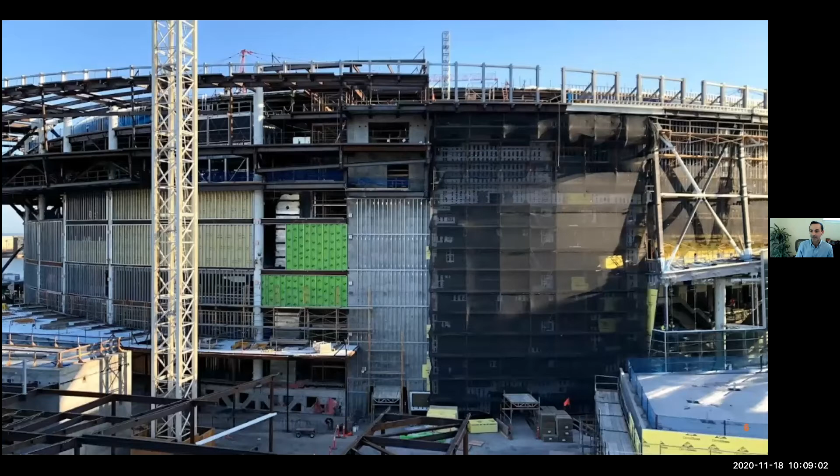A little later in the discussion, I'm going to jump into some of our guiding principles for building and delivering products to our customers, and it really all stems from our DNA in construction. But experience as a contractor is not enough. We believe that battle testing our software in the field is the right way to do things—put it under the most extreme conditions and make sure that when it gets into the hands of your super or your foreman, it actually just works.

Can anybody guess what structure we're looking at here? Go ahead and type it into the chat if you'd like to venture a guess at what this very large structure is. Or you could just say no idea—that's totally acceptable as well. I got Alan saying Chase Center. Anybody else want to venture a guess? All right, well Alan, you're the winner.

Our only guess is actually, in fact, yes. So this is the Chase Center in the Bay Area, new home to the Golden State Warriors—18,000 seats, 580,000 square feet of office space, and another 100,000 square feet of retail space. Myself and several other co-founders on the team were on this job site every single Friday for almost half a year, manually capturing this job site with static 360 photos.

Once the framing started to go up, it was taking us half a day or more just to take pictures of this job site. So not only was the capture work exhausting, it was way too time consuming, and we really just knew there had to be a better way.

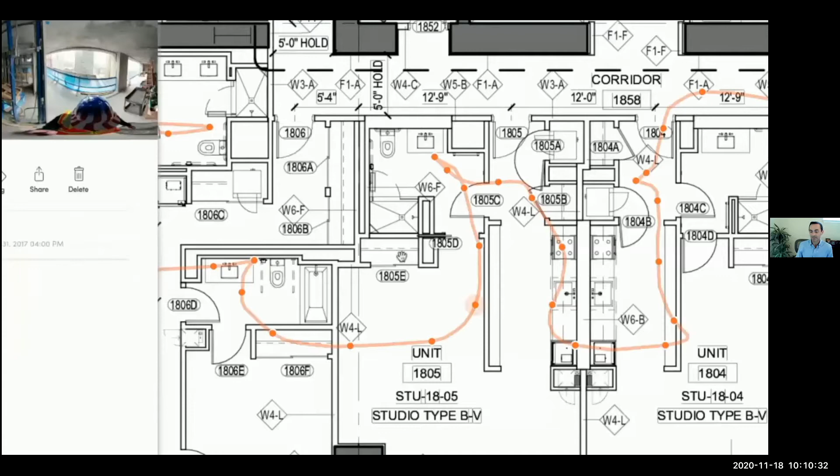That's why we created Video Walk, which, for those of you not familiar, is a workflow born from our own experiences in the field. You don't have to stop and take pictures—you just hit record and walk the job site. Our software automatically reconstructs the path you walked and places those pictures on the plans for you. This was a huge time savings for our customers as far as capturing the job site goes. But the main thing it did was unlock our ability to do what comes next, which was trying to answer this age-old, very challenging, very hairy question: what actually got installed today on the job site?

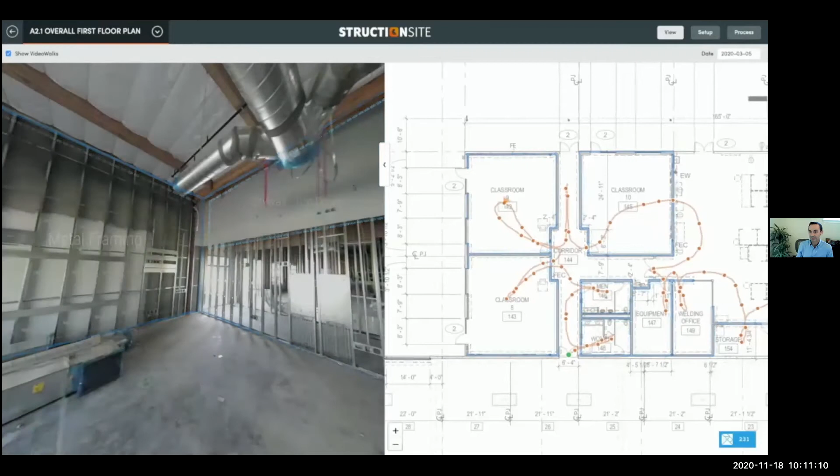So this summer, we launched a product called SmartTrack that can start to answer this really important question: what did we actually install today? And we make that an automated process for our customers. Using the 360 image data already collected in a video walk, combined with your existing quantity takeoff data, we can provide a visual map of what's installed, a production dashboard, and a CSV export that you can also import into your ERP or cost accounting system.

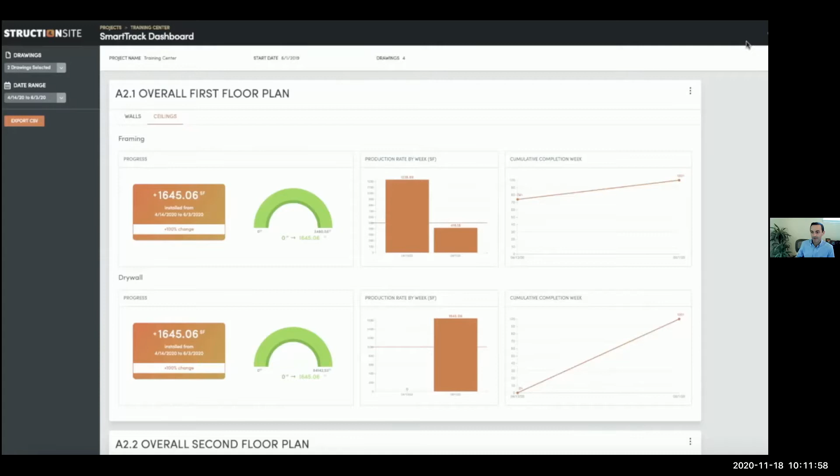So you walk to the job site on a Thursday afternoon, and you wake up Friday morning with a production report. This isn't something you're going to see at some point in the future—this is something we are actually delivering to customers today. If you didn't catch our summit last week, there's a great presentation with one of our early customers, Southmost Drywall, where their superintendent Ron Rankin and CFO Brendan Murray talk about how the software impacts their profits and the happiness of people in the field.

So that was a little bit about our past and what we do today. Before we jump into the future, I want to pause and reflect on some of what our team has learned so far that will guide us going forward. In the next four slides, I'll share some of our guiding product principles and core company philosophies—some we've had since the beginning, some that emerged in the early days as we built this company. I want to share them because I think they're a good window into how our team thinks about making products and supporting our customers.

Our first principle is truly grounded in our experience in the field and the construction DNA on our team: do what's needed, not what's flashy. There's a lot of technology being brought onto the job site today, and it's not all useful. As a software vendor, it takes discipline to stay focused on solving problems for our customers in the most practical and cost-effective way possible. A lot of the time that means doing something unsexy that just works, as opposed to something flashy. Our team continues to innovate and play with the latest technologies to see what's ready for use today, but if your super or foreman still can't figure it out in 30 seconds, we're probably going to put it on the shelf until it's ready.

This is such an important but really simple philosophy: you own your data. That means not only can you download all your raw files for project closeout, but we're committed to being an open system so your data can flow from StructionSite into other applications, even if those applications might be considered a competitor. This isn't just lip service—my co-founder Philip and our first product manager Bree are active leaders in the U.S. Institute of Building Documentation and Construction Progress Coalition, two organizations committed to creating open standards for sharing data across software systems in a non-proprietary format. You own your data is a really big one for us, and hopefully for you guys too.

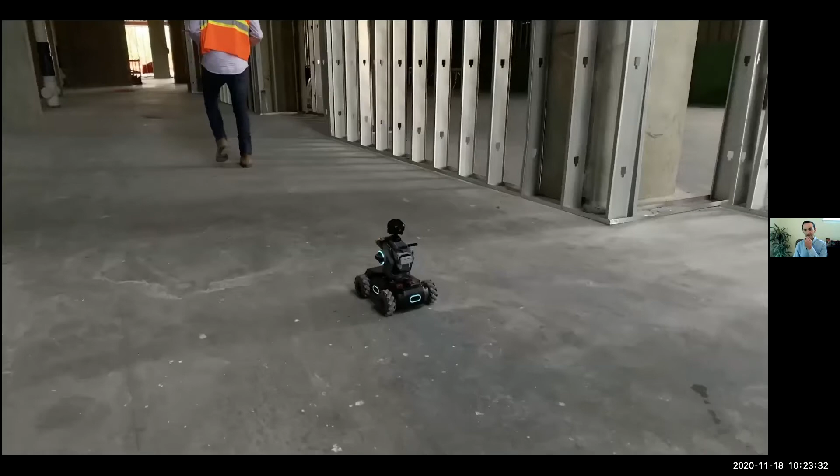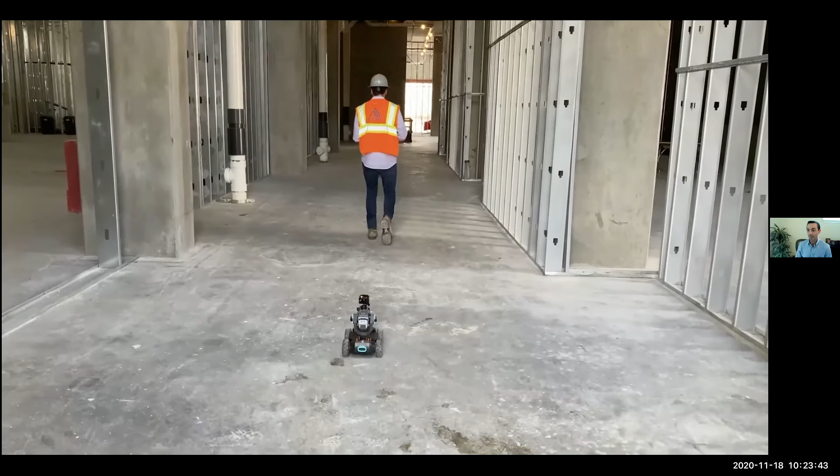A lot of our customers are not willing to wait for that future, and they're pushing us to deliver on this vision today. This is Andres Construction in Dallas, Texas - they've been testing the DJI RoboMaster to do automated capture. Other customers have started testing Spot, the Boston Dynamics dog, using it to capture video walks for them. We're seeing several different customers upload drone footage so that their exterior data can live in the same place as their interior data.

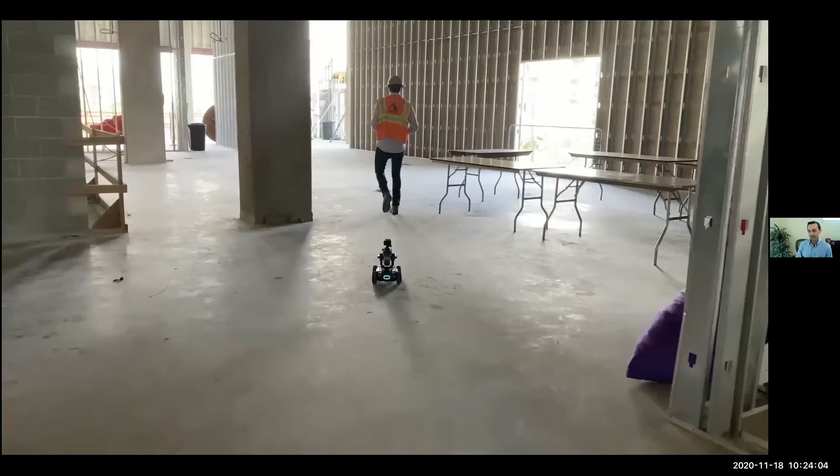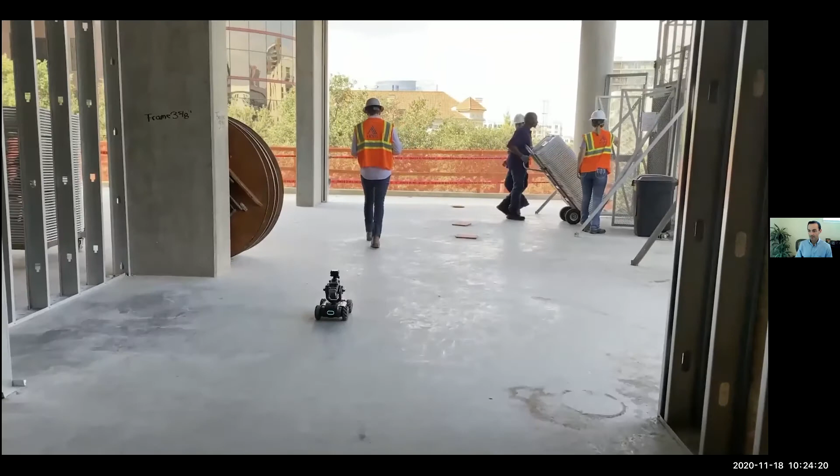Autonomous capture is a significant part of our strategy going forward, and this is a place I'd say keep your eye on in the next 12 to 24 months. We're not feeling entirely bullish on a lot of the current autonomous capture solutions we've seen, but we are starting to get excited about some of the ones coming to market in the next 12 to 24 months. We believe it'll take some time for that technology to become practical, but it's a space we're excited about and doing a lot of work in the background to make sure we're at the forefront of whatever technology can successfully navigate a job site without human intervention and be that capture workflow for your teams.

So once we've got all this photographic information, we can actually do some pretty amazing things with it. This is a detailed 3D point cloud generated from a 5-minute video walk of a construction site.

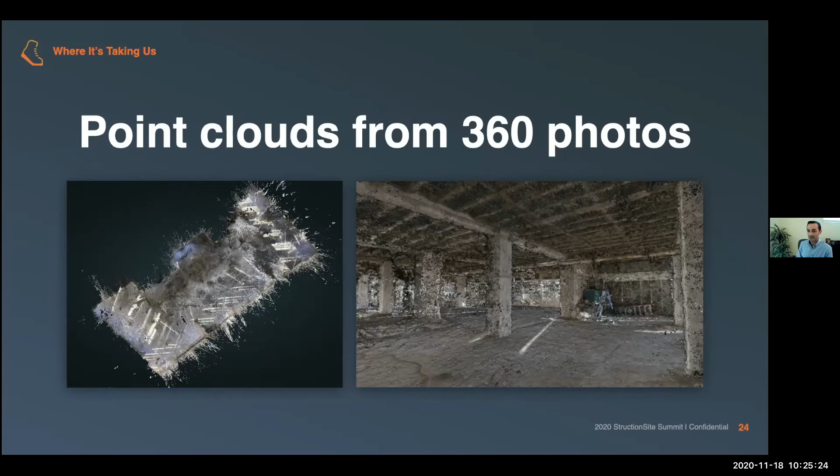Those of you familiar with photogrammetry know that it allows you to pull measurements and create models of existing conditions, but it's not horribly accurate. It's accurate to the point that you can see what you see here, but it's not a laser scanner, so we're not just interested in point clouds generated by photos. We know that for certain critical work, you need accuracy down to an eighth of an inch, and that really does mean laser scanning.

Fortunately, this is something that's really in the DNA of our company. This is Rithm, a company that my co-founder Philip and I started back in 2013. This product provides one of the fastest and simplest workflows to date for using 3D laser scan data to measure slab flatness and levelness, monitor the structure pre and post concrete pour, and track material quantities for flooring work. So it was very focused on floors and monitoring and these structural documentation and analysis tools. But this is something we're continuing to look at, how we integrate this type of technology into what we're doing today here at StructionSite, where it's not just 360 photos, it's looking at what we can do with laser scan data as well.

For those of you using laser scan data, we're definitely imagining workflows that seamlessly merge 360 photos with laser scans and make all that information accessible to your super or your foreman in the field. Laser scan data has historically been in the domain of VDC teams and pre-construction work, because the data is generally not optimized for viewing on a mobile device. But that's what your field people are using. They're not sitting in front of a computer all day, they have their phone and maybe an iPad. Pulling this data into StructionSite could change that and put this information in the hands of your people in the field where they need it the most.

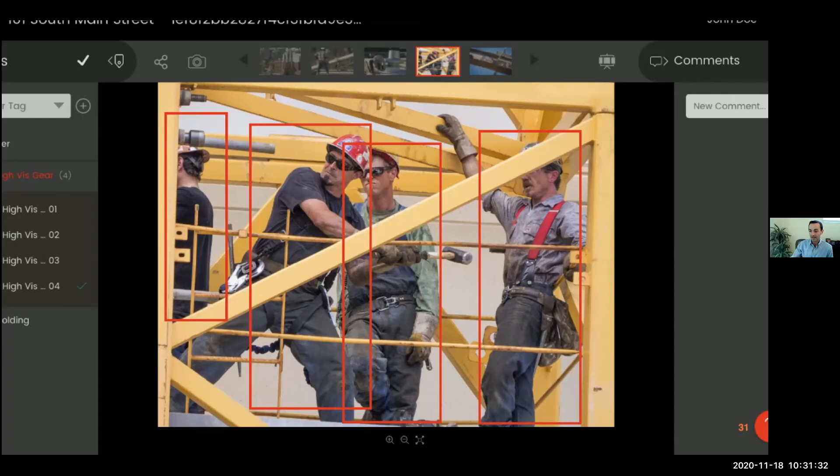So last week at our summit, our team actually announced an enterprise analytics product that's going to be available in a couple of weeks as well. For those of you on the call that are customers on an enterprise plan, you're going to get immediate access to this. Basically, it allows you to access real-time data and pretty detailed information about how StructionSite is being used across your company, across your projects, all the way down to individual users.

It's going to give you really unparalleled insight into knowing how your teams are adopting the tool and following the processes you've defined for regularly capturing the job site. So we're committed to not only showing you this information within our own product, but also allowing you to connect it to tools like Power BI, Microsoft, and other enterprise analytics tools you probably already have developed and deployed.

I'm going to stop and pause here for a moment to see if there are other questions you guys want to ask. I have a feeling everybody's going to be quiet today, so feel free to type it in the chat box, as some of you have done as we're going along here. Questions are very much welcome.

We're going to move on to the next big question we're trying to answer for our customers, which is: what got done and are you on track? As I mentioned earlier, this is a pretty hairy question to answer, and one that's historically eluded an automated way for our industry.

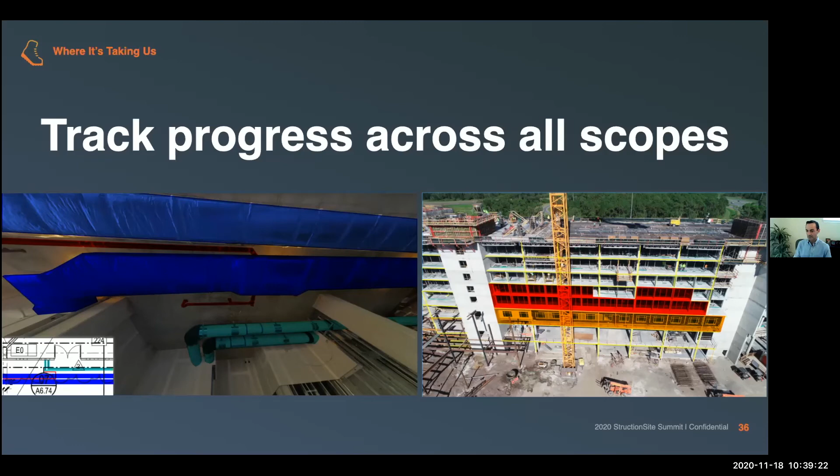This is going to allow us to truly understand how much of your schedule and your estimates reflect reality. And this is not sci-fi stuff. I know there's a tendency to sort of sell the big vision for the future and be very challenged to deliver that.

So I'll share that this is actually a workflow we've been experimenting with alongside Webcor on their SFO project in San Francisco. We've been able to help them identify when critical work first appears in the photos and when it's completed, which is really giving them the most accurate view of progress that they've ever had access to.

It's a very different view of production than what we've been delivering for SmartTrack as far as trade partners. But what we're hearing so far is that from the perspective of a GC, this is the highest value data that they could ask for as far as understanding if the job is on track.

So there's really these two worlds of how we view progress on the job site, and the lens we look through with the trade partner is different than the lens we look through as a general contractor. And we're exploring this workflow in particular to be more focused on the lens that we look through as a general contractor, and what we want to know to help us make better decisions about what's going on our job site and how to go have healthier discussions with our trade partners. And do that early and not late, before it's too late.

All right, so we're going to move on to our final question here. And this one's really about quality. Is it done correctly? And I think I mentioned at the beginning of this discussion, we think this is the hardest question to answer. It is the most nuanced question to answer.

Production is really about, is it in or is it not? And if I'm using computer vision and machine learning, if I see something there, there's a certain amount of confidence I have that that's installed. Quality is more nuanced, is a little more subjective, but it's also higher stakes, right?

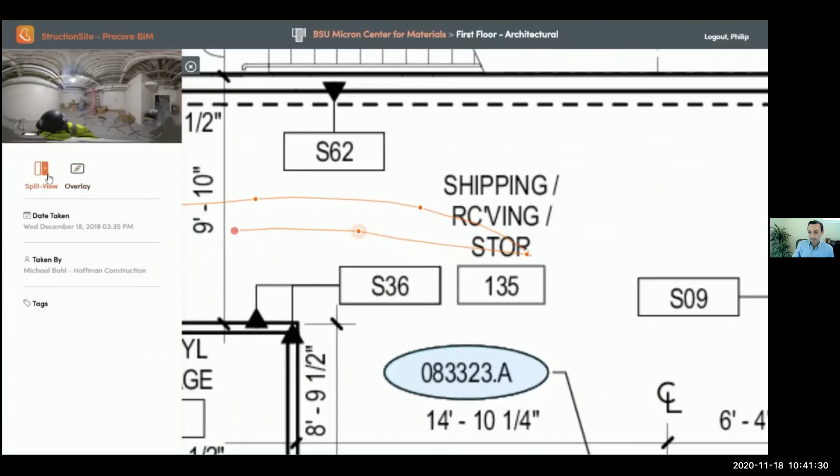And so let's talk about what that actually means to us. First, this means being able to compare design from BIM against reality on the ground. We've already got an integration with Navisworks that a few of you might actually be using, but Navisworks is not a tool that everybody has access to on the job site.

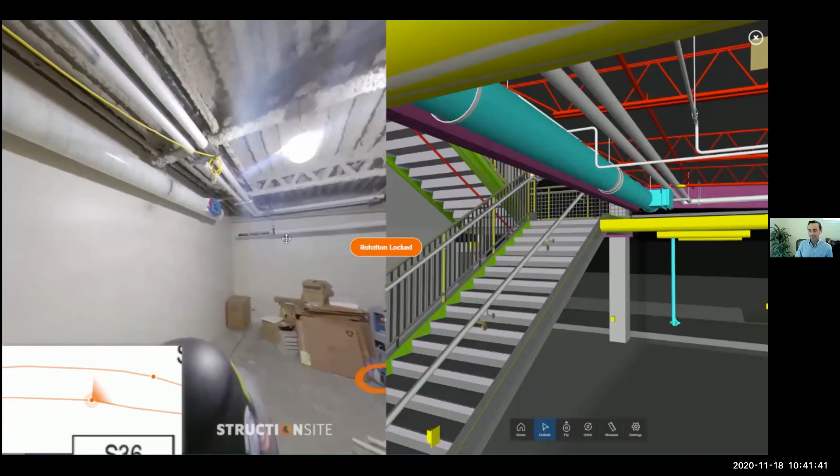And we also know that it's not the future, right? It's going away. It's not the future. It's not where we are headed. Some of you may have seen at Procore's Groundbreak conference that their keynote...

Basically, we're working with an integration with Procore BIM, which is what you're seeing here. That allows you to take the models on their platform and do sort of that quick heads-up comparison that you're seeing here, to be able to compare what the images are saying to what the model is actually saying.

We're also going to be partnering with Autodesk to allow this same exact functionality with the models that are being stored in Autodesk's construction cloud.

And on the Procore BIM side, what this also is doing is actually allowing our customers to have the same sort of tool set in our app that they have in Procore BIM. So if you want to take a measurement, you can still do that in StructionSite using the integration that you see here. Again, that's a measurement from the model.

We know that it's not just important to sort of have this comparison tool. When you see something, you've got to be able to take action on it. And that's why we're committed to make sure that basically you can do all of your QA, QC, and punch list workflows remotely, which is something that a lot of teams are being challenged with today.

We're working on a deep integration with BIM 360 issues, which I don't know if any of you attended AU yesterday, but they launched Build, which might be a totally different set of APIs.

I'm told the APIs will be overlapping and that they'll work together, but the environment is rapidly changing over there at Autodesk, so we're trying to keep track of that. Regardless, we're committed to building an integration with Issues and whatever comes next for Autodesk, whether that's Build. Basically, that allows you to link and create a new issue, or link an existing issue, to the StructionSite 360 photos, so there's bidirectional communication between those two platforms.

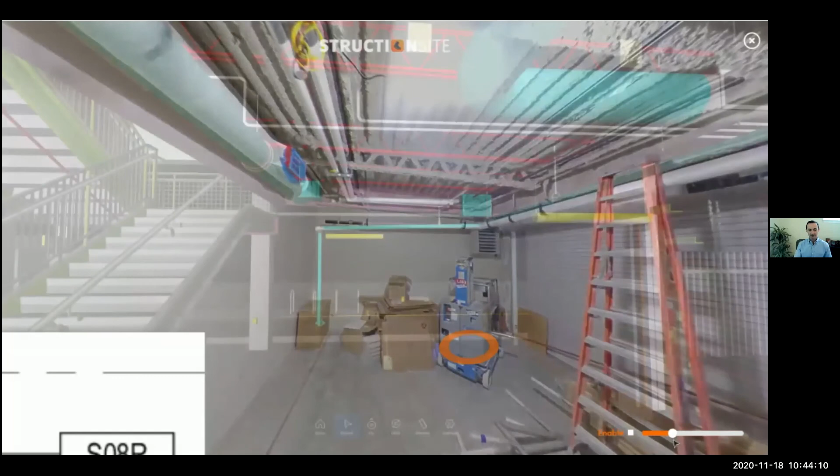We've talked a little bit about incorporating BIM into StructionSite and our ability to create point clouds as two separate workflows, getting reality data that your teams are capturing with our site documentation tool. But what if we bring both of these types of workflows together and let you actually compare a 3D data set from your images with what your model's actually telling you? I'll say there's a little irony in this for me personally, because I spent 9 years at Faro Technologies, where a lot of what we promoted was the ability to perform a comparison like this using laser scan data against the model.

And of course, the major hangup was that project teams were not willing to invest the time to go out and scan their project every day. I get it, it's too long, it's too time consuming, the data processing takes forever. So we never really got to realize this vision we saw, of can we actually do a comparison between the model and the reality data we're collecting in a 3D way?

I think there's a lot of work to do here before these workflows are practical. Those of you familiar with BIM know some of the major limitations are things like the LOD of the model, and how quickly and often it's updated. Anything we're using as a benchmark and reference for what is done or complete, if that data set isn't being updated as often as it could be, and if our comparison and benchmark aren't accurate, there are a lot of challenges there. We love BIM, we're investing more and more in it all the time, but we also want to be aware of its limitations as it's developed today.

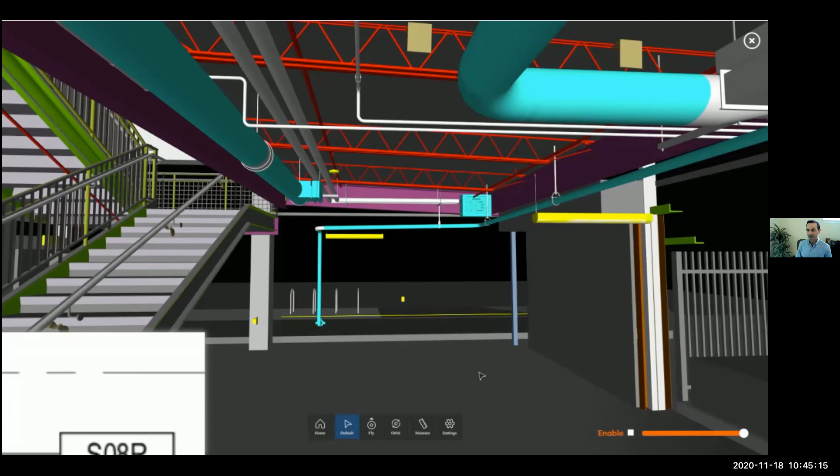So let's try to wrap this up with a single vision we have for the future and the type of software we're building here at StructionSite. Using reality captured data and layering in some of these new advances in computer vision and machine learning, it's software that we want to deliver as a historical record of the job site. We want to help you understand what got done, and ultimately help you determine if it got done correctly, in whatever way we can automate that, but also supporting that with manual workflows where that's more appropriate.

Intelligent project tracking software, we believe, is going to fundamentally change the way that we manage our projects. When teams in the field are less focused on manually tracking the work and more focused on moving the job forward, really great things can happen. There's actually a white paper written by our friends at DPR about the value of tracking production, and it wasn't just about understanding the impact on profit. It was about giving the team a scoreboard they could look at and measure themselves against and get excited about beating that target. So culturally, there's value there as well.

I'm going to leave you guys with a pretty funny quote from Ron Rankin, a superintendent at one of our early Smart Track customers, Southmost Drywall. He says, compared to manual tracking, using StructionSite is like the difference between flying to the moon and riding a horse. This is actually a quote from our summit last week that I just thought was really funny. If nothing else, we have a lot of fun with our customers over here at StructionSite.